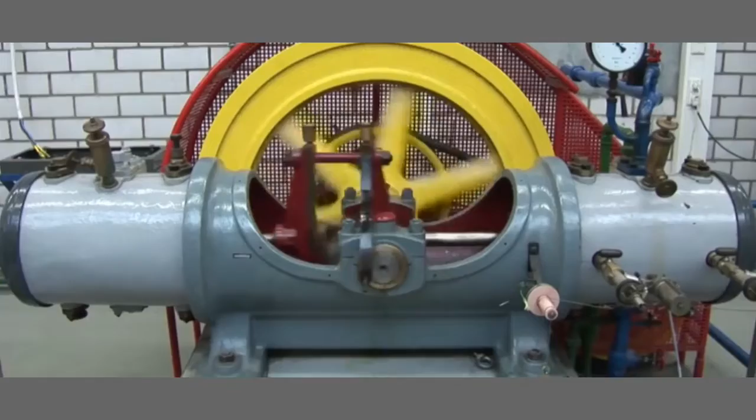In off-road biking, frames, handlebars and wheels are subjected to high alternating mechanical loads. It is just as obvious in the case of a garage door spring. The spring is unloaded when opening the door and loaded when closing the door. The connection rods of this old compressor have endured a large number of rapidly changing tensile and compressive forces.

Even when cycling quite moderately in the city, many components are exposed to periodically varying loads without us being aware of it. The crank arms are alternately under load, then swing back almost load-free, and are under load again with the rhythm of pedaling. The spokes, the pedals, even the individual links in the chain are stressed periodically.

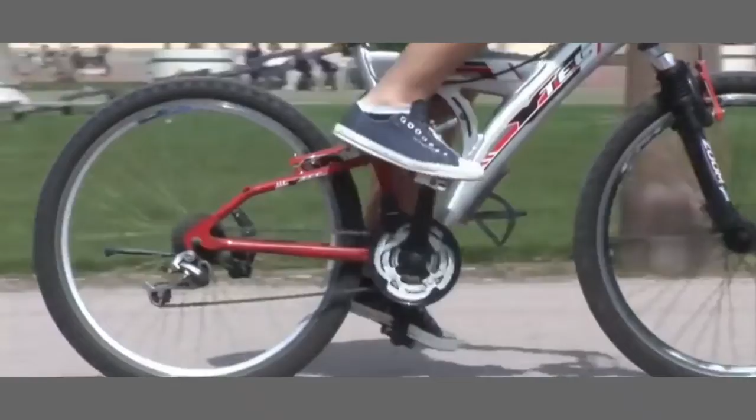Also, the railway bridge over the River Rhine, seemingly totally at rest, alternately has to bear the additional burden of a heavy freight train and then only its own mass. Aircraft experience quite different stresses during take-off and in turbulence than on the ground.

This type of loading is generally termed fatigue loading, and the material responds to it with fatigue. The term fatigue is used because it takes some time for the failure to occur under repeated loads. The problem with materials is that they normally endure less at repeated loading than with a once-only load. The wire does not break when first bent, but bending it back and forth repeatedly leads to an early fracture.

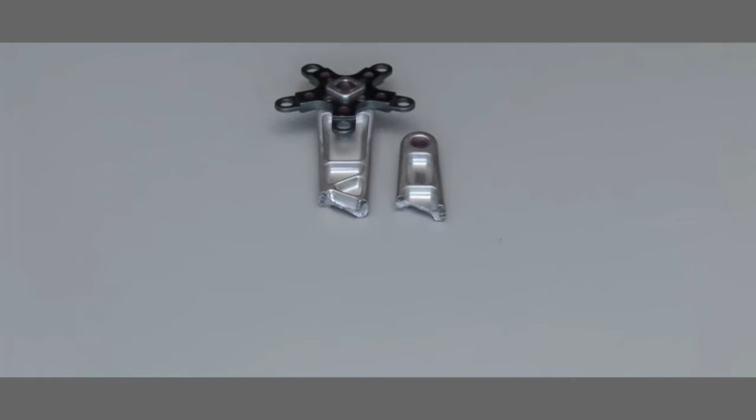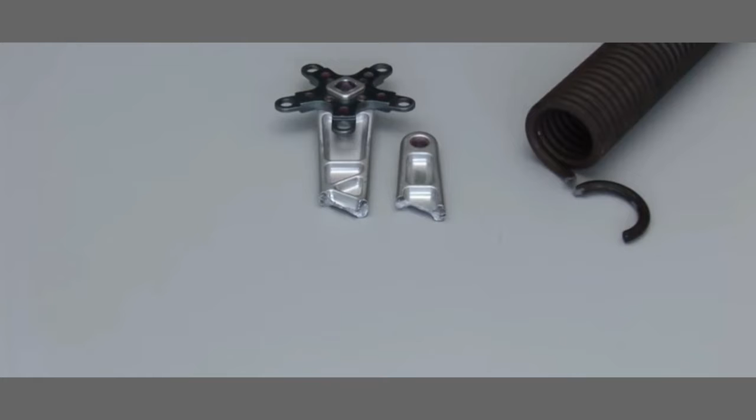This bicycle crank arm had only been able to endure the cyclic loading for a certain time before it broke. The fate of the garage door spring was the same. It had borne the opening and closing of the garage door about 60,000 times before it finally fractured.

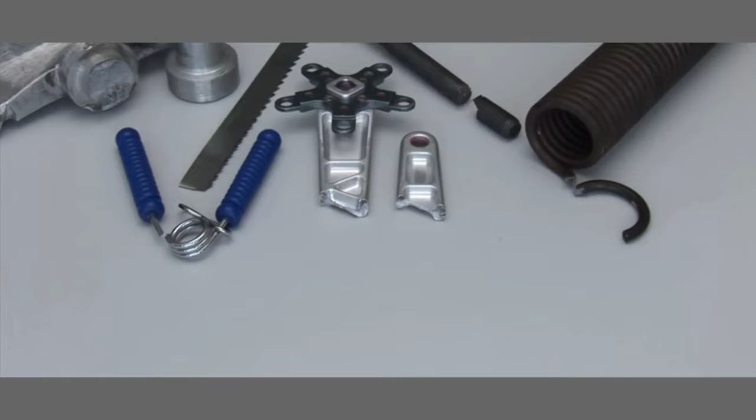The broken exercise equipment, a torn blade of a fan, a bandsaw blade full of cracks, the broken screw, a defective universal joint, and many other examples show how important this phenomenon is. Each day thousands of items break due to cyclic, often repeated loading. How can we make sure that all these components withstand the cyclic loads? To achieve this, one has to test the materials appropriately.

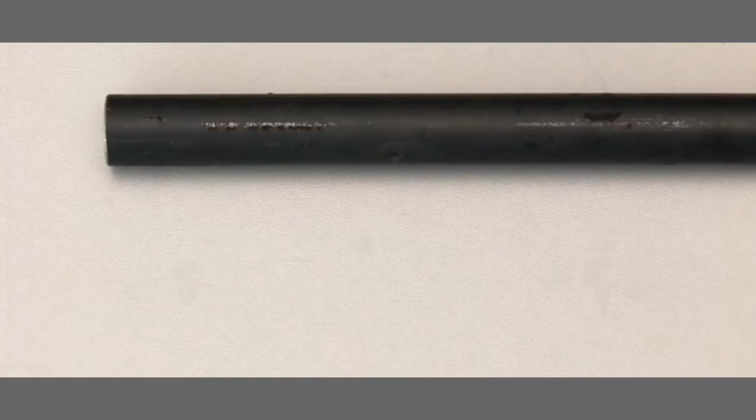We intend to measure the fatigue strength of a frequently used steel in our laboratory. Hot-rolled steel rods made from the structural steel S235JR are used as base material. In order to eliminate the influence of the surface and to stress the material in a well-defined manner, suitable specimens have to be machined from the rods.

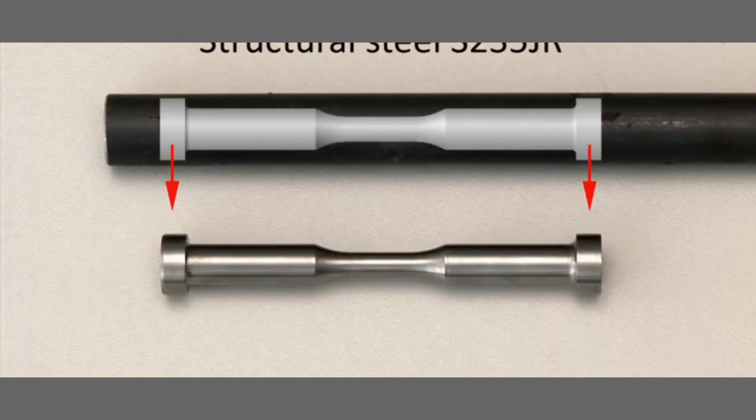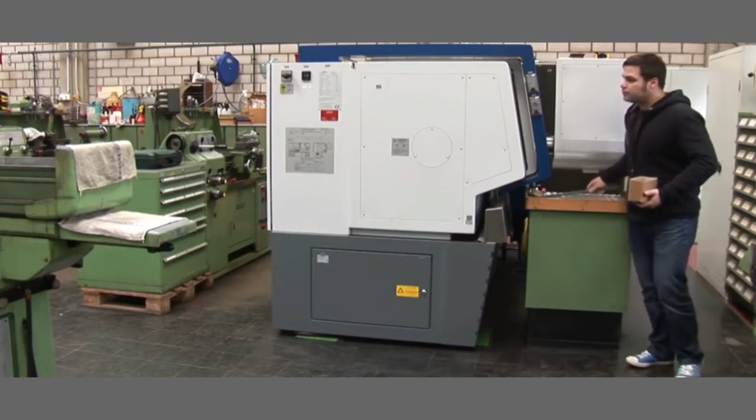This specimen type would be ideal. The shoulder-shaped ends have been designed for safe gripping. The actually tested region is cylindrical with a diameter of 6 mm. The material tester goes to the workshop to get 10 specimens manufactured from the rods, not just one. All of the specimens are as identical as possible.

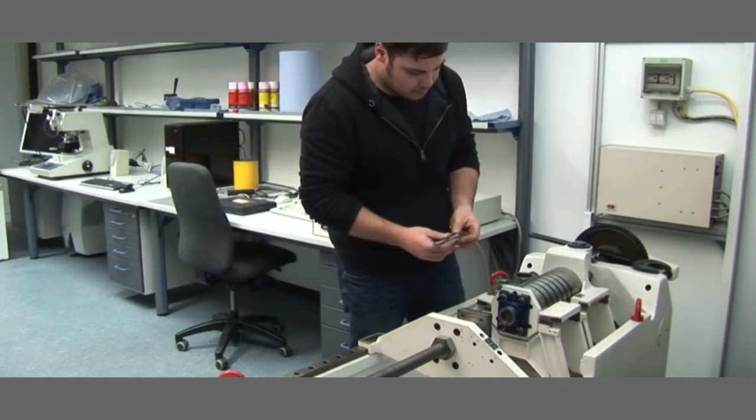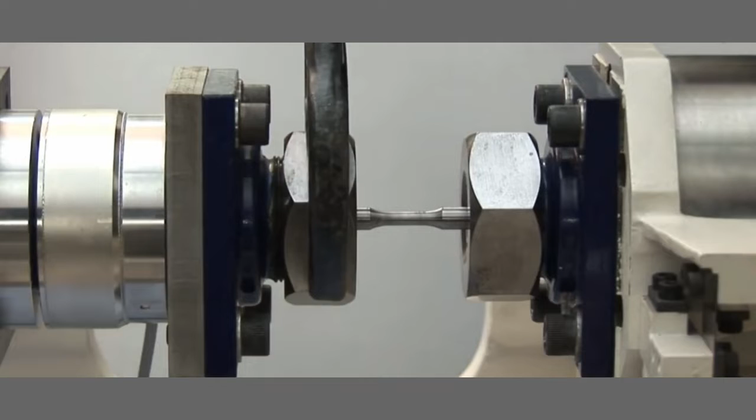Back in the lab, he has all specimens ready for use and picks out the first one. He mounts the specimen carefully and securely into the fatigue testing machine. Together with 2 half shells, he inserts one end of the specimen into the right specimen grip. With a union nut, he locks the right end of the specimen. Likewise, he mounts the left end of the specimen into the left specimen grip and tightens the nuts. The preparation is now complete.

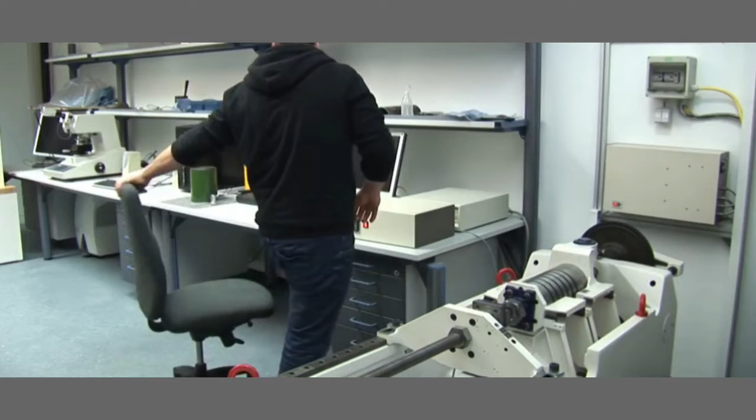The material tester then selects the appropriate test parameters on the control computer. He intends to load the first specimen alternately with a tensile force of 7 kN and a compressive force of 7 kN. The mean force is 0. A click on the start button and the testing machine begins to stress the specimen periodically.

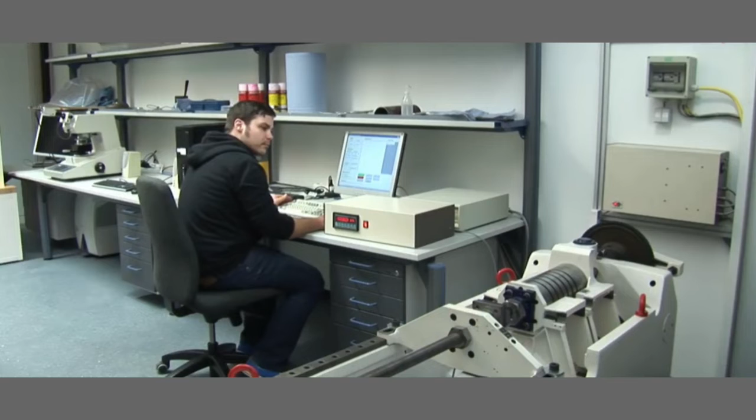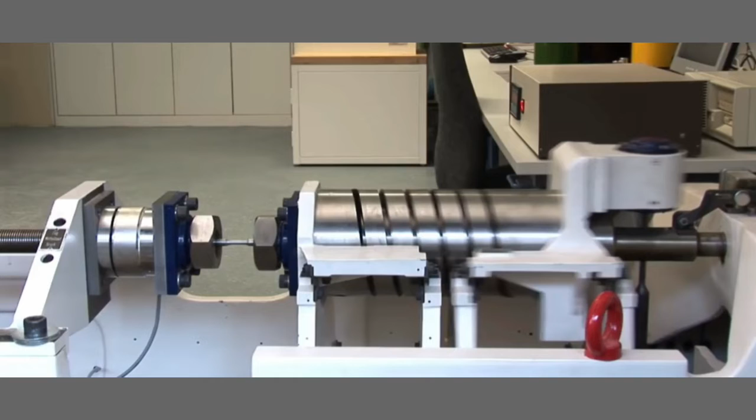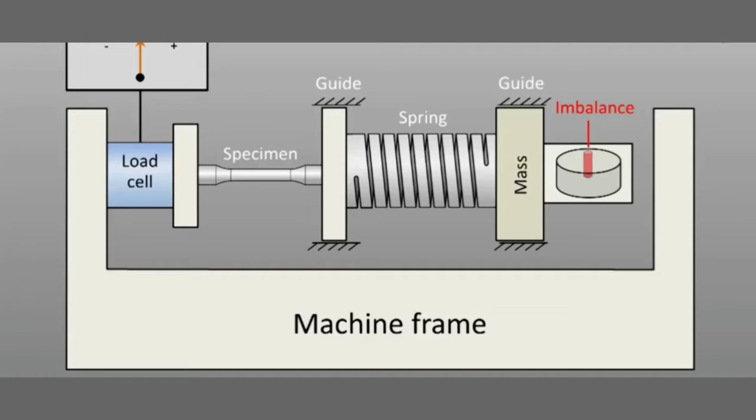Our fatigue testing machine is equipped with a mechanical resonance drive. The specimen is connected at its left grip via a load cell to the machine frame. At the right grip, a spring is mounted, and there in turn a mass. An imbalance stimulates the mass to vibrate. Longitudinal guides prevent the mass from vibrating in the transverse direction. Via the spring, the test force acts on the specimen. By varying the excitation frequency of the imbalance, the test force can be controlled. In our case, the specimen is loaded with about 25 cycles per second.

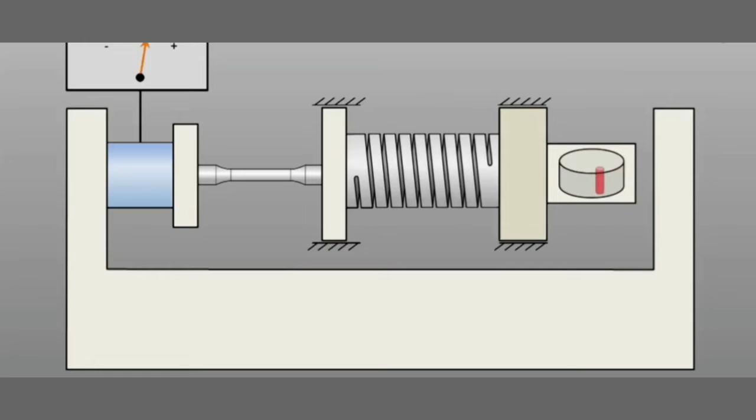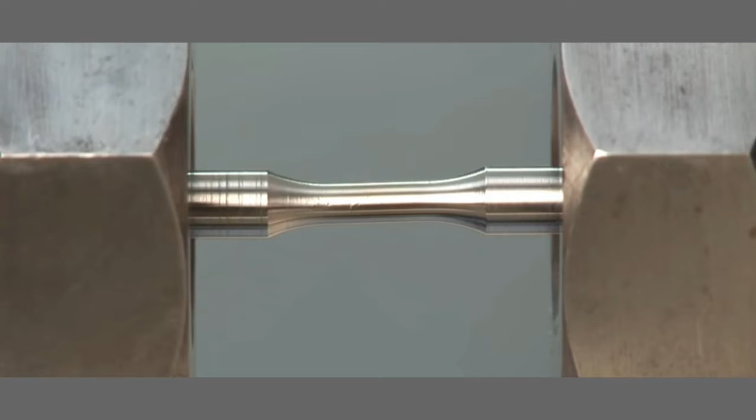Meanwhile, the first specimen has already endured over 300,000 load cycles and still seems to be intact. In reality, however, several cracks have already developed starting from the surface, the so-called fatigue cracks. With each load cycle, they grow a bit further into the specimen. The biggest crack gains the upper hand, grows the fastest and finally leads to fracture after 381,000 load cycles. The first test is finished.

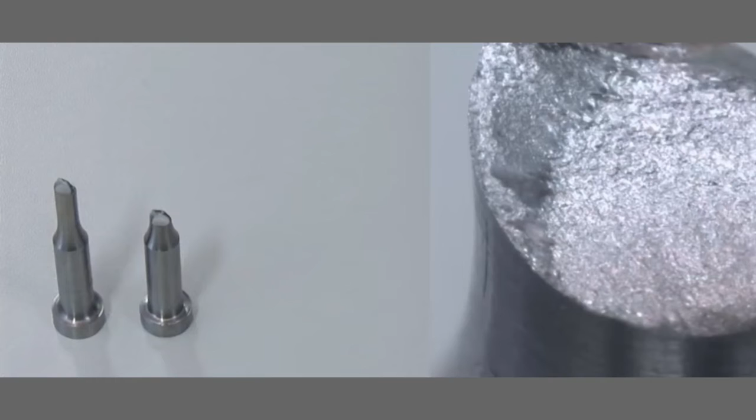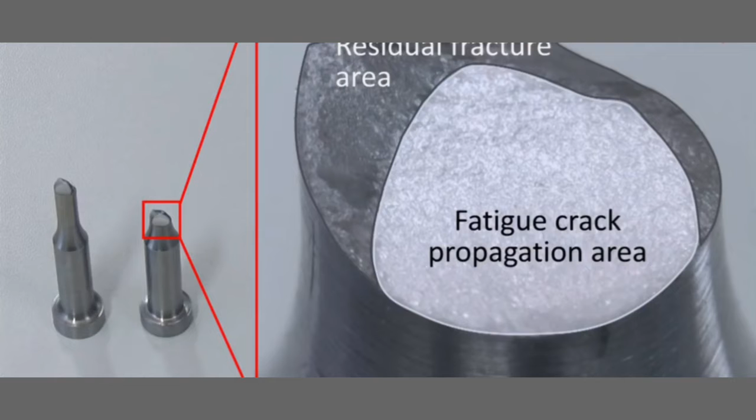The material tester removes the fragments cautiously and inspects the fracture surfaces. At first glance, the fracture surface looks unimpressive. A closer look reveals two regions: the rather dull, predominantly flat fatigue crack propagation area and the rough residual fracture area. The residual fracture area results from the final catastrophic rupture. The fatigue crack propagation area has developed during the cyclic growth of the fatigue cracks starting at the surface of the specimen. What does the fatigue crack propagation area look like at higher magnification?

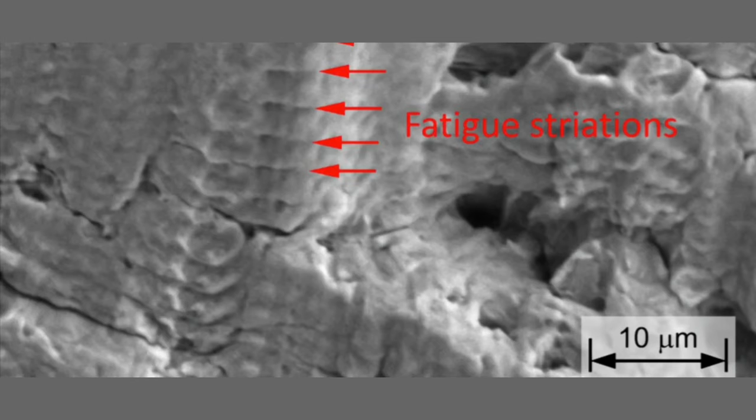One of the fragments is carefully placed on the specimen stage of our scanning electron microscope. Now we can investigate the fatigue crack propagation area in detail. In some places, but not everywhere, parallel grooves and ridges can be seen, the so-called fatigue striations. Each groove and each ridge has been formed by an individual load cycle, a typical phenomenon. Of course, now we want to know how many load cycles this material can endure with other loads.

For this purpose, the material tester picks the next specimen from his supply and installs it into the fatigue testing machine. He chooses a higher alternating load for the second specimen, a tensile force of 7.5 kilonewtons and a compressive force of 7.5 kilonewtons. Under the increased load, the specimen is only able to withstand 43,600 cycles to failure. The third specimen is only tested with a cyclic load of 6.5 kilonewtons. Under this reduced load, it does not break even after 3 million load cycles.

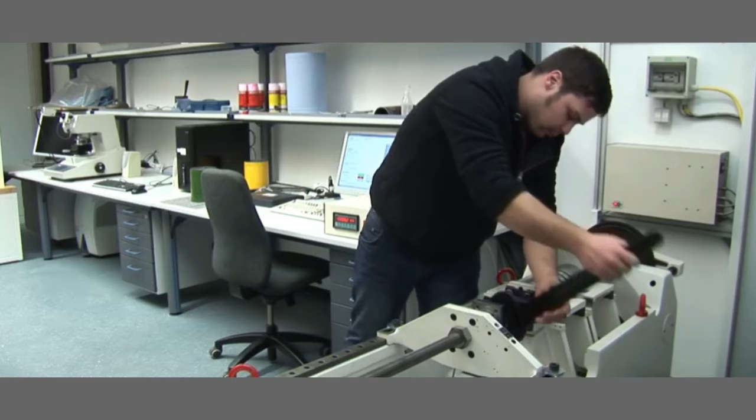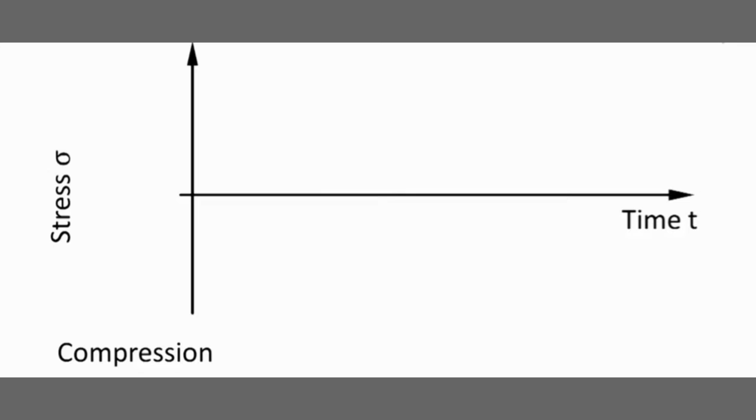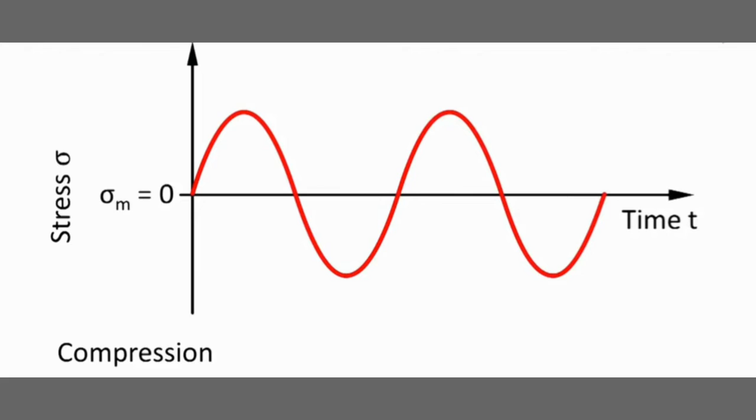Additional specimens complete the series of measurements. Some of the specimens are tested with the same load we've already used. In this way, we get an impression of the range of scattering. To compare materials in a fair way, the different cyclic loads are converted to the respective stresses acting in the specimen. In this case, the stress alternates sinusoidally around the mean value, which is termed mean stress sigma m. In this series of tests, the mean stress is 0. The stress amplitude is labeled with the symbol sigma a.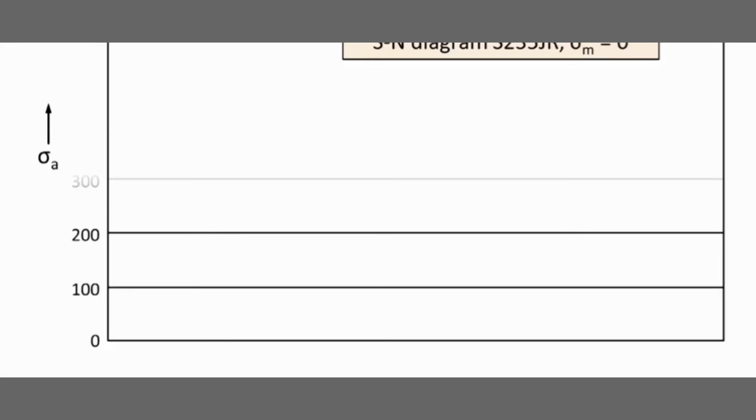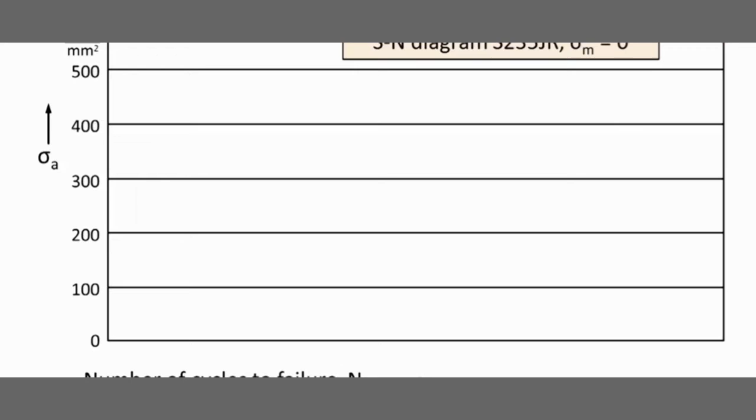For graphical representation, the SN diagram is used, also termed Wöhler diagram. In an unusual manner, the predetermined variable is plotted upwards on the y-axis. It is the stress amplitude sigma a. And the result of the test, the number of cycles to failure N, is plotted to the right on the x-axis. To fit small and large numbers into the diagram, the x-axis is not scaled linearly, but logarithmically.

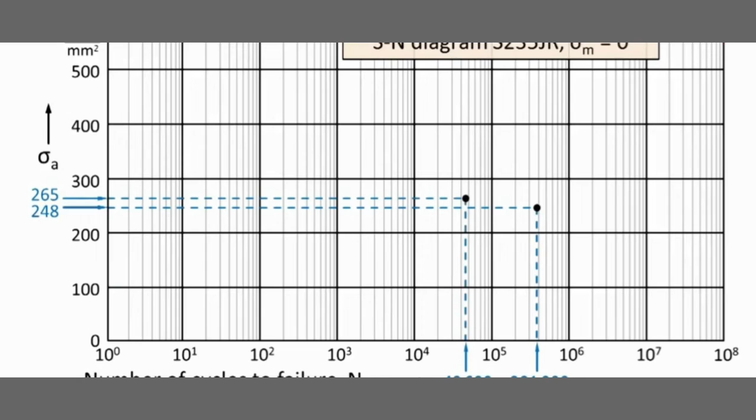The first specimen was loaded with 7 kilonewtons. This corresponds to a stress amplitude of 248 newtons per square millimeter. Under this stress amplitude, it broke after 381,000 load cycles. The second specimen was loaded with 7.5 kilonewtons. This corresponds to a stress amplitude of 265 newtons per square millimeter. Under this stress amplitude, it broke after 43,600 load cycles. And these are the results of the other specimens which have been tested by us.

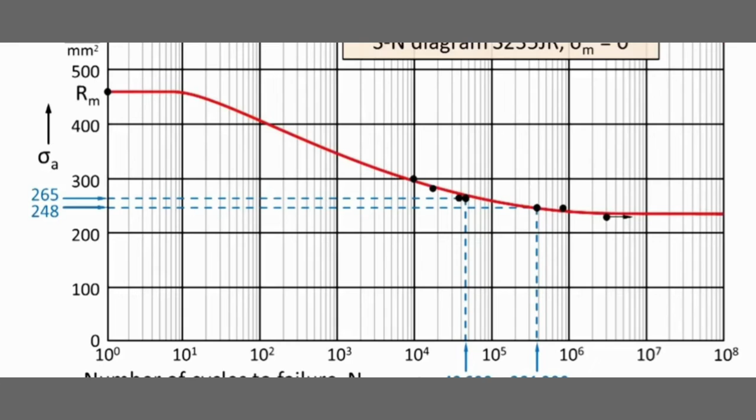When additional specimens are tested and the results are displayed as a curve, it becomes clear that this material will not break below a certain level of stress amplitude, even after a very large number of cycles. This stress level is termed fatigue limit sigma capital A. For most steels with body-centered cubic structure, the fatigue limit is reached after 10 million load cycles at the latest. It must be noted that the experimental results scatter considerably. Therefore, instead of a sharp curve, a statistically defined scatter band is commonly used.

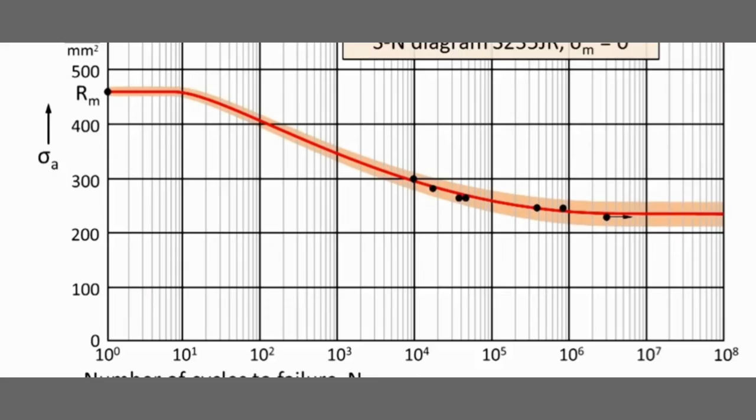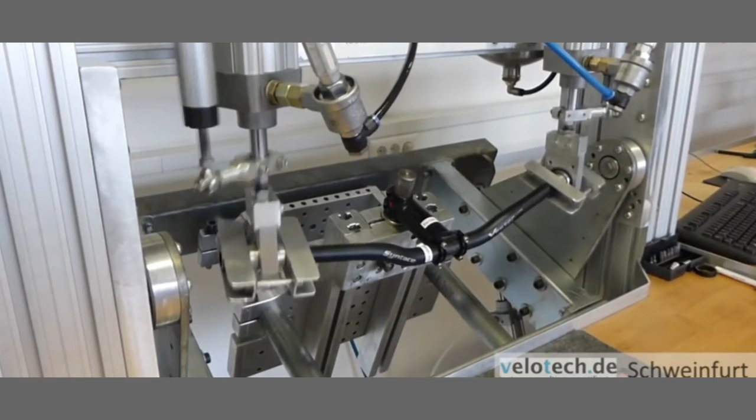Of course, most users don't load their components with a constant cyclic load, but rather in an irregular manner. Therefore, these components have to be tested under this type of loading, termed operational loading. In this test rig, critical bicycle components are loaded similarly to practical use. Stem and handlebar must endure the typical bending and torsional loads for a sufficient number of cycles. Only then they are approved for serial production.

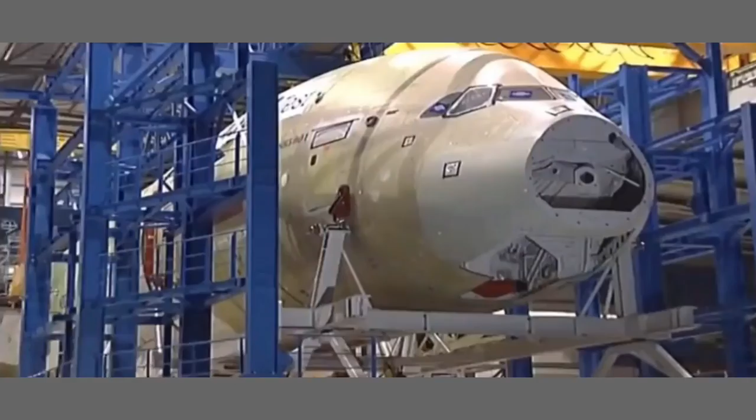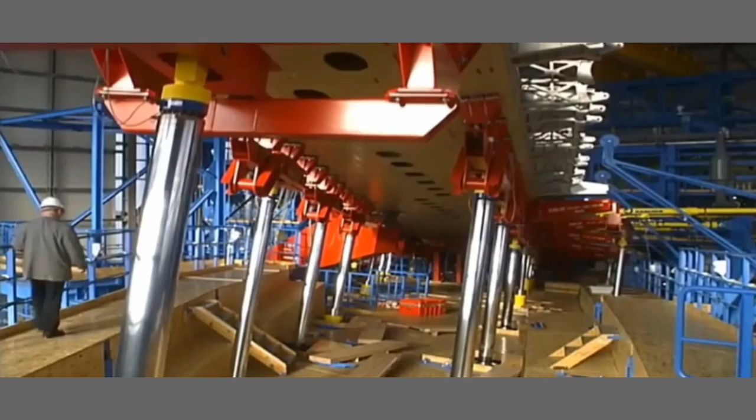Moreover, the fatigue strength does not only depend on the material. The mean stress has an important influence, the shape, the surface quality, environmental conditions and much more. Not an easy story. Before an aircraft is allowed to take off for the first time, it has to go through extensive stress tests. The wings and many other elements are cyclically loaded in large test rigs. This later ensures the safe operation of the aircraft.

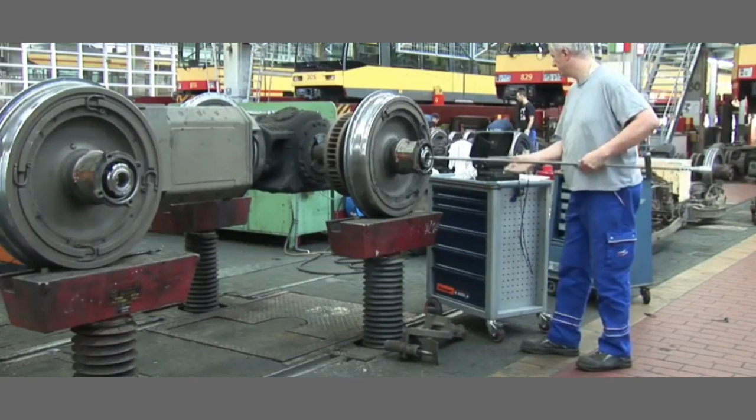Nevertheless, particularly important components are repeatedly examined for fatigue cracks in the course of operation. The tram, for instance, has to go into the test hall at regular intervals. Experienced staff use ultrasound to examine special components, especially the wheel set axles, to check whether they are still in perfect condition.